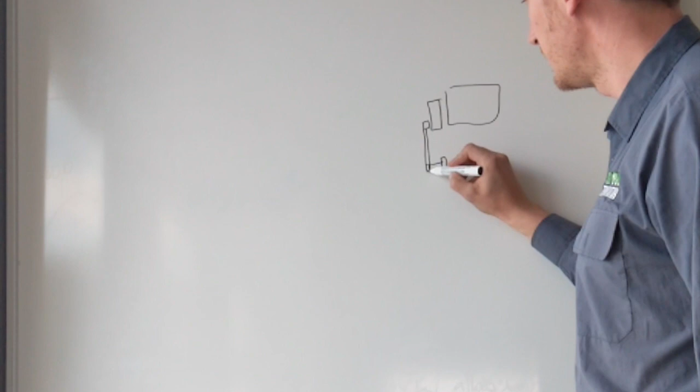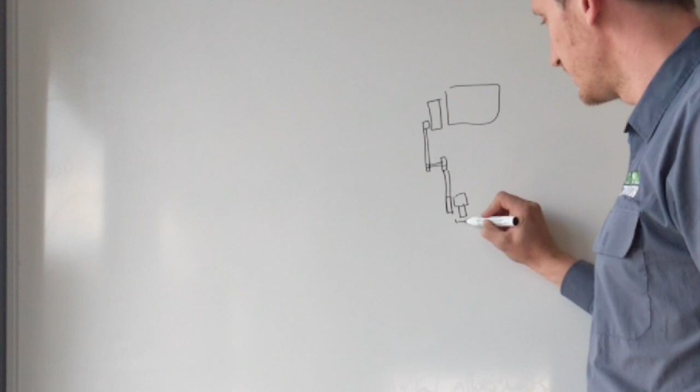So that's basically moving the belt drive inboard on the machine, with a belt down to the chopper and a belt down to our Terminator. The Terminator takes that belt drive onto a pulley, and there's simply a right-angled gearbox there, converting the belts coming down the side of the machine from horizontal shafts to a vertical shaft. Then there are two belts across to some spindles, which our twin mills are on.

So the two mills spin in the same direction, with just two V-belt drives driving each of them. There are a few reasons we do it this way. There's a speed-up from the gearbox to the spindle, so we keep the gearbox speed relatively low compared to the speed of the mills, roughly half the speed, so we're not stirring up oil in the gearbox, which is where most of the heat and wasted energy is generated.

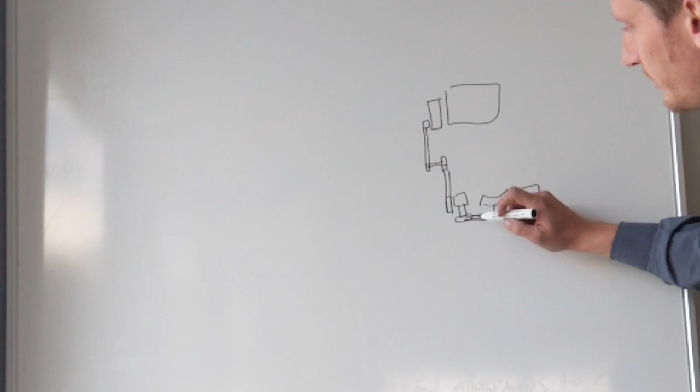We also have the gearbox facing with the pinion gear facing down, so we always have oil on all the bearings. If the gearboxes faced the other way, it's more of a challenge. With that slower speed gearbox facing this direction, we don't have any external oil pumping or cooling. It's simply a change in direction, and that gearbox runs relatively cool. So our typical temperatures on a 30-degree day would be around 70 degrees oil temperature, which we monitor in the cab.

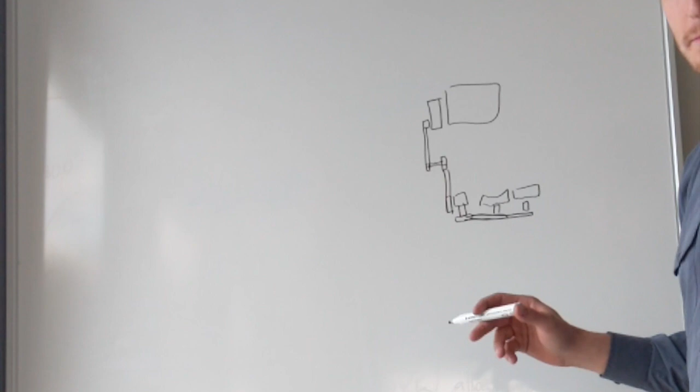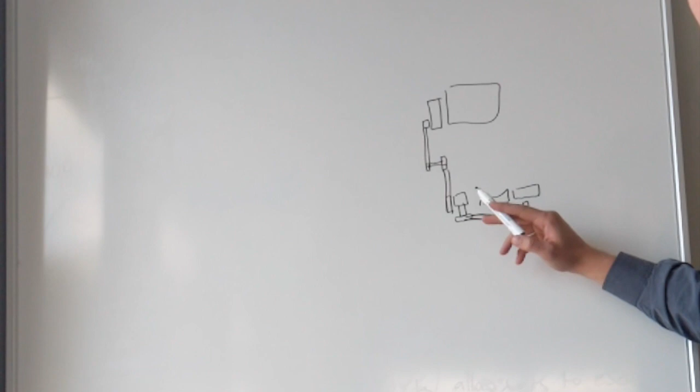The two spindles have especially custom-made bearing arrangements. We've gone through a number of iterations and lab testing, plus 81 machines operating in the field last year and 32 the year before, to really prove that system. They've got temperature monitors on them as well, so if a bearing is on its way out, we can start to pick it up. But the key thing is these bearings are really robust, and anything happening in those mills is supported by the bearings, not the gearbox out here, which is potentially a more fragile component.

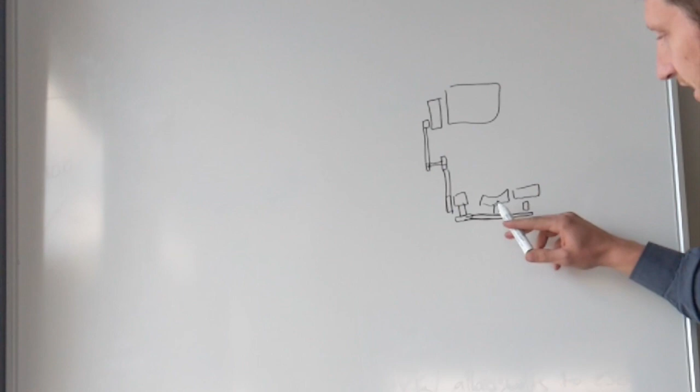So the bearing takes any shock load or vibration from the mills. The other thing is the two mills are independent, away from the load of the other one, so if something was happening with this mill, it wasn't going to affect this one. But from there, the load back here has the flexibility of the belt, so we've got a bit of ability to slip, which reduces the transmission of vibration and load from here back to here.

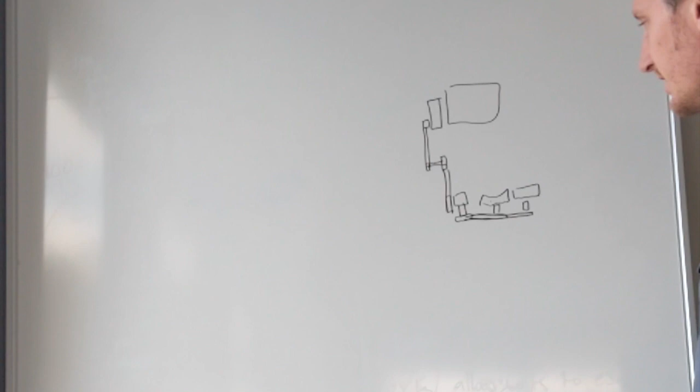The other cool thing about the way this is set up is that you can dismantle and replace mill components individually from each of them. They come balanced as a set, and you can just drop them in, 20 minutes and you're up and going again, which is great.

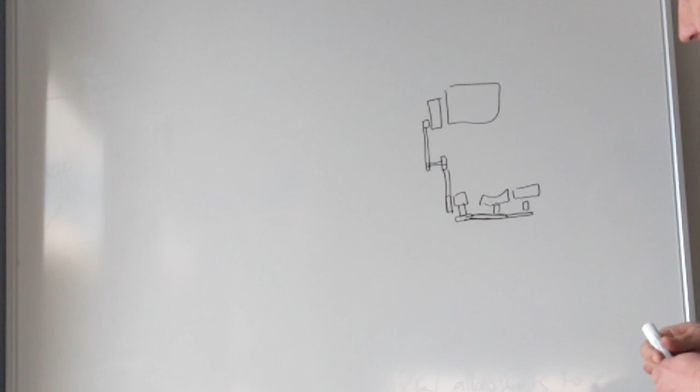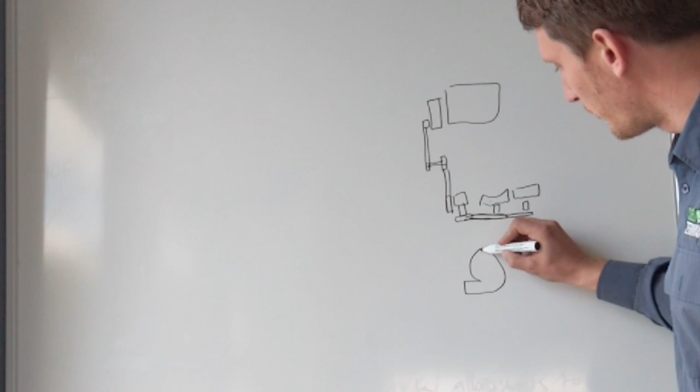I guess having them spin the same direction has the potential to have some issues with spread, because you've got one like this that wants to spin that way, and this one here spinning the same way.

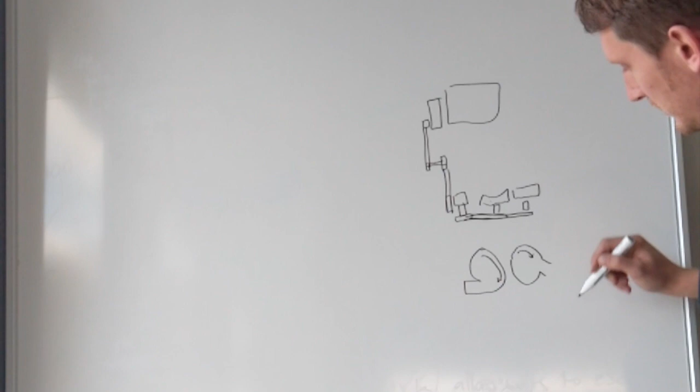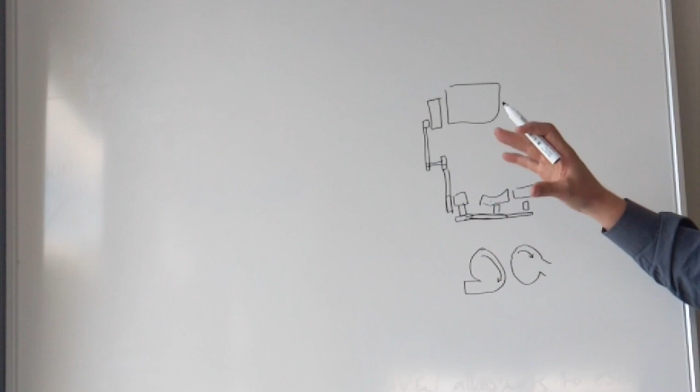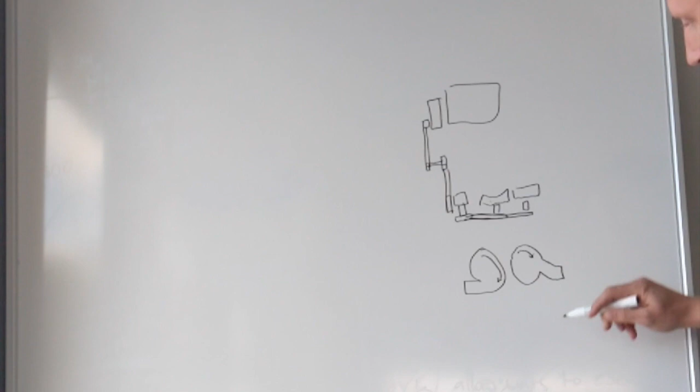But what we find is that the airflow from the mills is actually enough to really draw material from the harvester cleaning shoe, not affect the harvester cleaning shoe. We've proven that. And on the back side, it spreads it really well. We have these chute extensions on this side, so it's a bit of a curved shape, meaning they look a little different from left to right, but we're finding we can spread it really evenly and draw that material in.

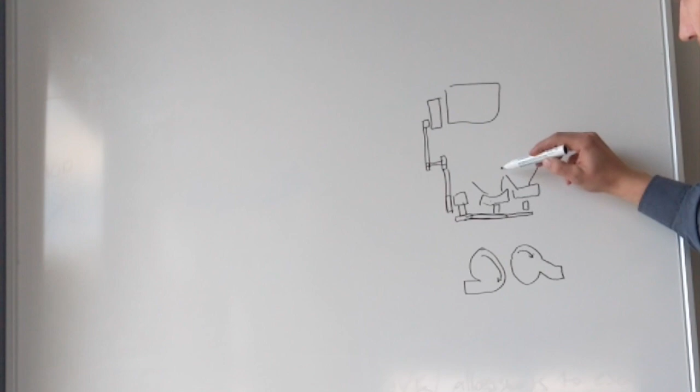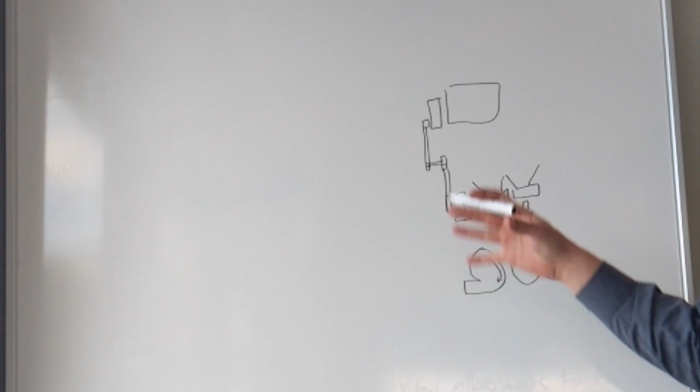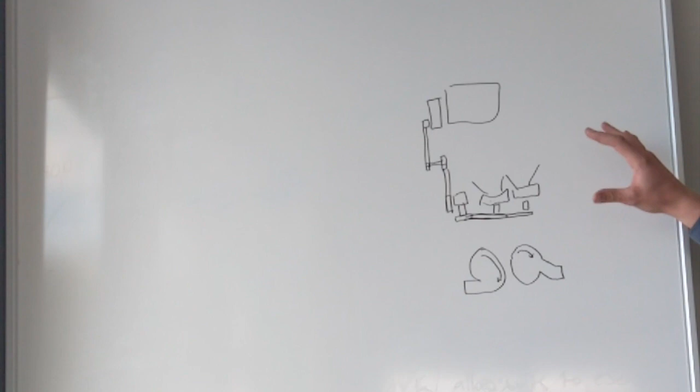The other part about having them side to side like this is that the feed of material, we're not moving the chaff very far into those mills. We're simply going from the full width, something like 750 mil on each side, down to a 350 mil diameter hole, drawing that material in. We're not moving the material away from its natural flow, and we're not affecting the airflow coming off the sieve. It wants to go into the hole and be drawn in and spread. That's basically the reason we operate in this configuration. We really believe in this configuration, and we've got a huge number of runs on the board with it.